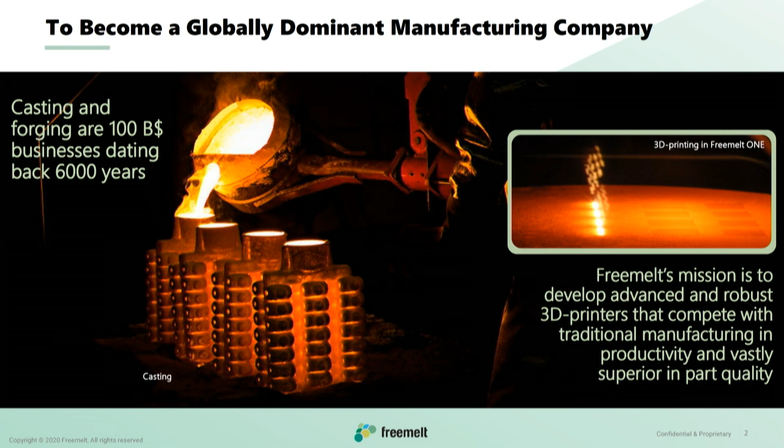And to do that, our mission is to develop advanced and robust 3D printers that compete with traditional manufacturing in productivity, but that will be vastly superior in part quality for some applications. So this is our ultimate goal, but on the way there, we also have, of course, stepwise goals for the company. So please, next slide.

The story of Freemelt starts in much from the story of Arcam, which is a company in Gothenburg in 3D printing. And the founders of Freemelt all have their background from Arcam, including myself. I was there for 10 years. It's a 3D printing pioneer company founded in 1997. They delivered their first system to customers in 2003.

Focusing on systems for implant manufacturing from 2007, and later expanded its business also into aerospace, selling in total hundreds of systems. The focus on aerospace led to the fact that it was bought by General Electric in 2017 for about 6 billion Swedish crowns. And up to that point, Arcam was the only supplier of electron beam 3D printers until we started the company in 2017 and started delivering systems to the market a bit later. So next slide, please.

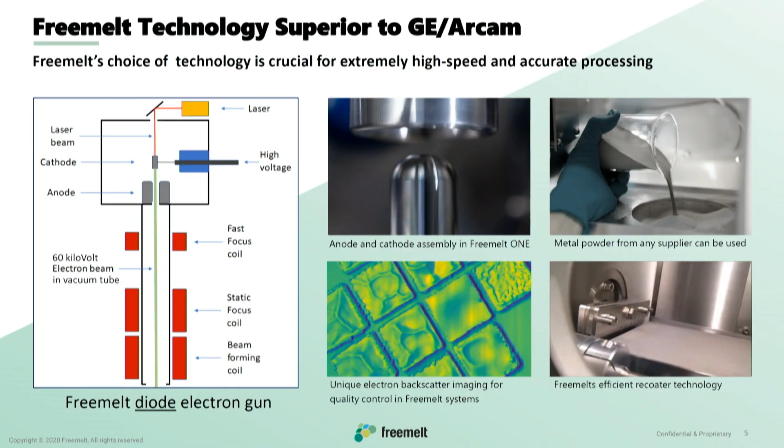We also use metal powder, and our customers can use metal powder from any supplier. This is a strategy for opening up markets and making it possible for customers to have versatility in the supply chain. We also have developed unique imaging, backscatter imaging for sensing, in order to have quality control in our systems.

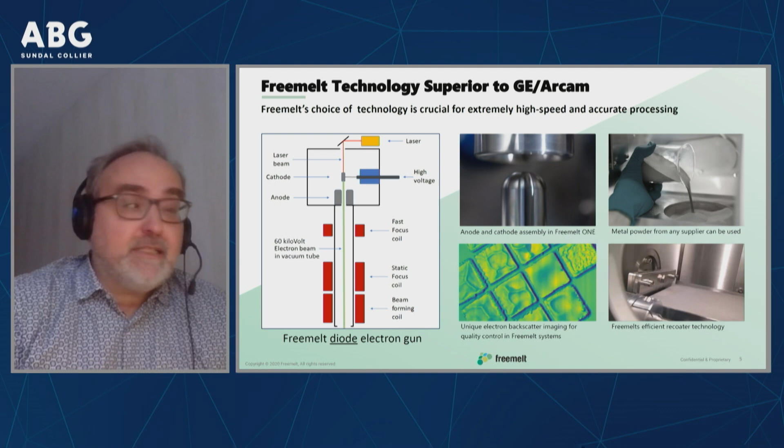And we also have developed our unique recoater technology, just like we developed the electron beam technology. So we have started from scratch with the technology, looked at everything, and developed what we think will work for the markets that we address. So next slide, please.

Freemelt started 2017. After exactly 2 years, we delivered the first system to our first customer, actually spot on time for what we promised to the investors back in February 2017. And Freemelt is now the #1 choice for material development in 3D printing. So far, we have installations in the single-digit numbers.

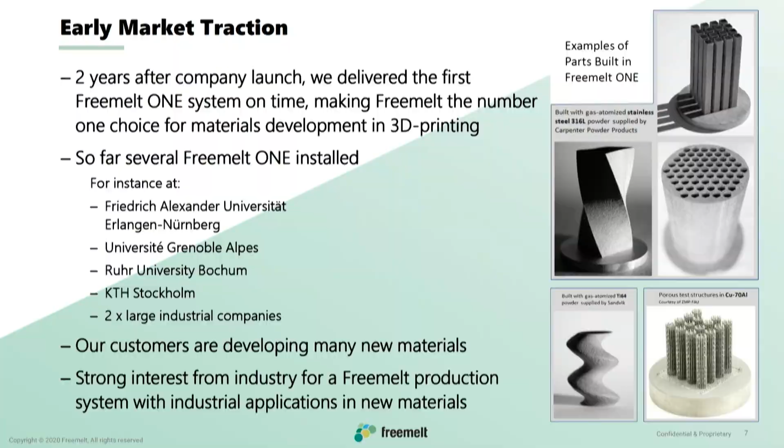We have, for instance, some of the most renowned institutes and universities in Europe. We have systems in Sweden, also at KTH, that we installed this year. But we also have systems with 2 large industrial companies with R&D departments that are very interested in material development for their applications.

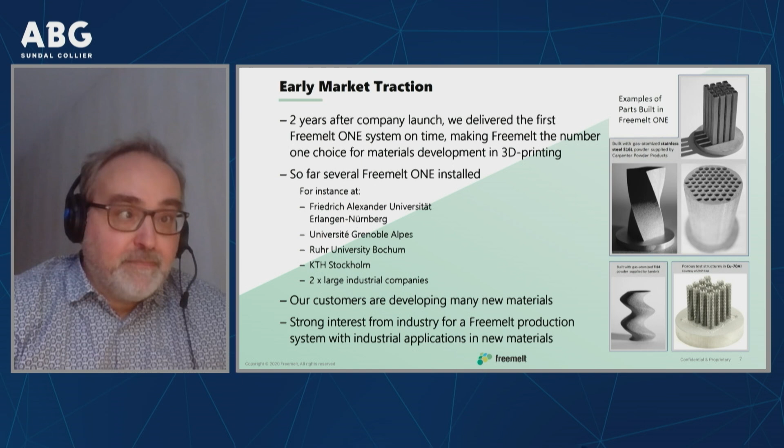And our customers are developing many new materials. But there is also a strong interest from industry for a Freemelt production system with industrial applications in these new materials that are being developed. Next slide, please.

So already from the start, we had a business strategy, which is a 2-step strategy. We are going from R&D to commercial applications in close collaboration with customers and partners. We started by developing and bringing to market an open source material research system called Freemelt One for development of new materials to push the need for an industrial manufacturing system.

And as I pointed out on the previous slide, some of the most renowned R&D institutions are now customers to us, producing research results promoting our technology. So what we say now is that this first step in the business plan is implemented, and we are now moving into the second phase of the company development. So next slide, please.

And the next phase then is the development of an industrial 3D printer optimized for volume production, with manufacturing processes and core technology directly transferable from Freemelt One. So in this way, we are aiming to build an ecosystem with a new system and a research system where processes can be developed and transferred between the 2 systems. But in this ecosystem are also our customers and suppliers of raw material, the powder, but also software companies providing software solutions.

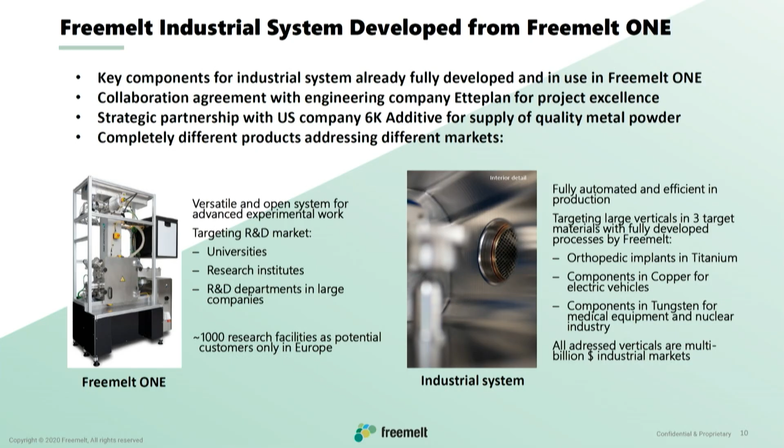Etteplan is chosen for the reason that it's a service company focusing mostly on additive manufacturing; it is one of their focus areas. So we have management from Etteplan in the steering group of the project, which is important for the excellence of this project. We also have strategic partnerships now with a US company, 6K Additive, for supply of quality metal powders to us and to our customers.

And these two products that will be in our product portfolio are completely different products addressing different markets. So we will continue to build and ship Freemelt One systems targeting R&D markets, universities, research institutes, and also R&D departments in large companies. That's where we already have success. And a rough estimate is that there should be about 1,000 research facilities as potential customers only in Europe, the same or probably even more in North America.

So we do see a great potential in this market of continuing our efforts to expand with sales towards research and development. But then we will also have a fully automated and efficient machine for production, targeting large verticals. And after a business study, we have selected 3 target materials where we are developing material processes for this system.

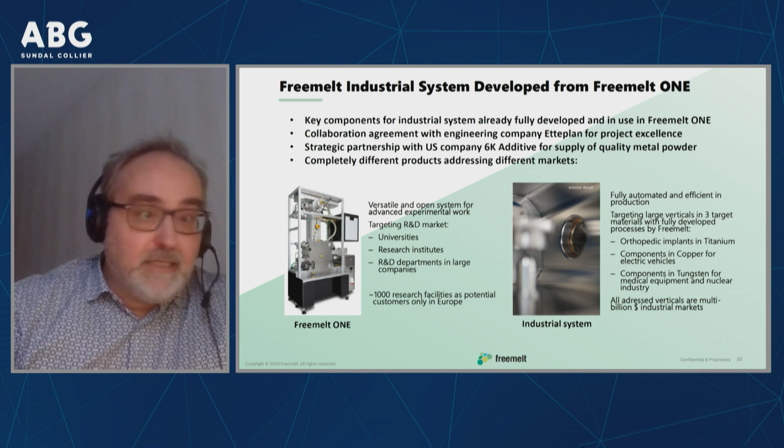One is orthopedic implants in titanium. One is components in copper, mainly for electric vehicles. And the third one is components in tungsten for medical equipment and the nuclear industry. All of these verticals are multi-billion-dollar industrial markets. Next slide, please. First, I will talk about the business case of titanium orthopedic implants. Next slide.

So this is the area where 3D printing has had the most success, actually. Somewhere around 3 to 4% of all implants in the world are manufactured today with 3D printing. The reasons for that are that it's a big advantage, both for lifetime in the body and also for adherence to the bone, with the net structures that can be built directly in the same process step, which enables bone ingrowth into the metal part.

And the total implant market in 2018 was $51 billion, mainly in joint replacement. Knees were the biggest part, followed slightly behind by hip implants, and then other extremity, and then other implants. And we are focusing initially on hip and other extremity parts like ankles and shoulders.

The growth of the market in total is about 3.5% worldwide, but the market share of 3D printing grows much faster than that. So it's expected that 3D printing will be the dominant technology in the future for implant manufacturing. So here is a huge market for us to address with a material, titanium, that works really, really well with electron beam technology. Next slide, please.

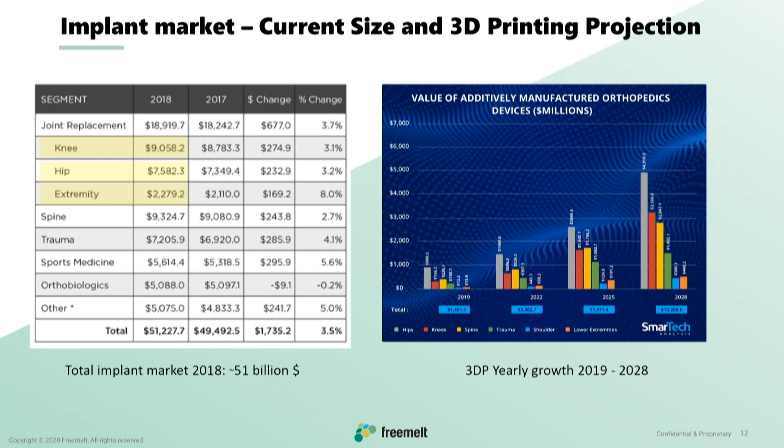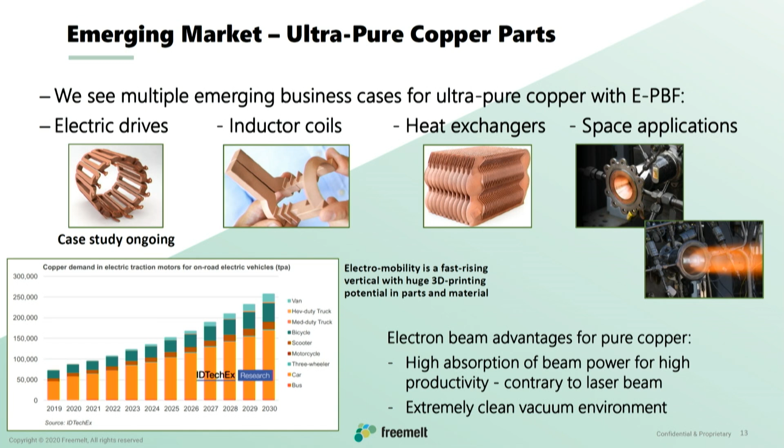And the other is that we are working with a vacuum technology. The processing takes place in vacuum. That means that we can have an extremely clean environment, which benefits the ultra pure processing of copper, which is very important because going from pure to ultra pure copper raises the conductivity of copper by up to 30%, which is, of course, crucial for things like battery technology and electric drives and so on. So here we see a very big potential for electron beam.

There's also been a number of case studies with electron beam systems when it comes to research on 3D printing with pure copper. So next slide, please.

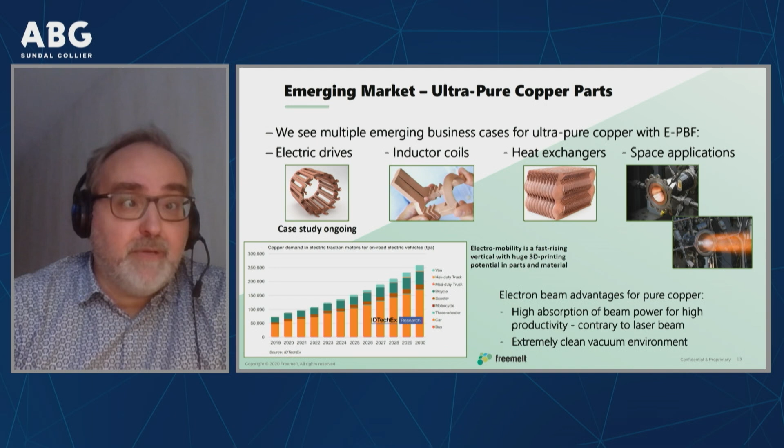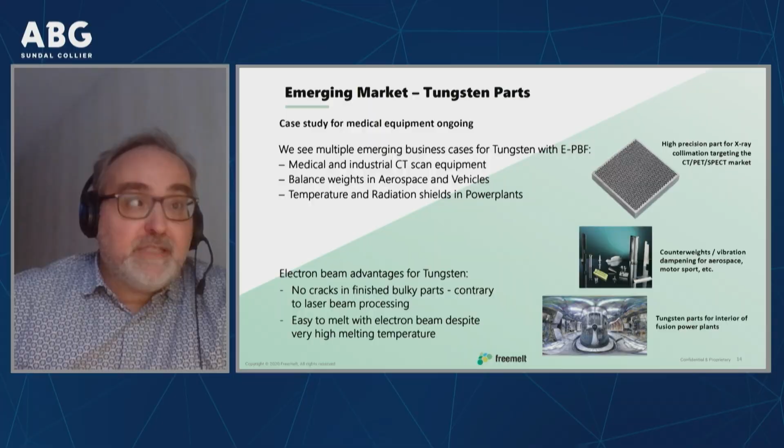The third and last market that we are initially addressing is parts made of tungsten. This is probably a little bit smaller, but still big applications. We are in a case study in this area for medical equipment. That is what you see on the top picture. This is what's called a scatter grid for CT scan equipment, which is a good size market for us, and also here the electron beam technology has strong advantages over our competitors.

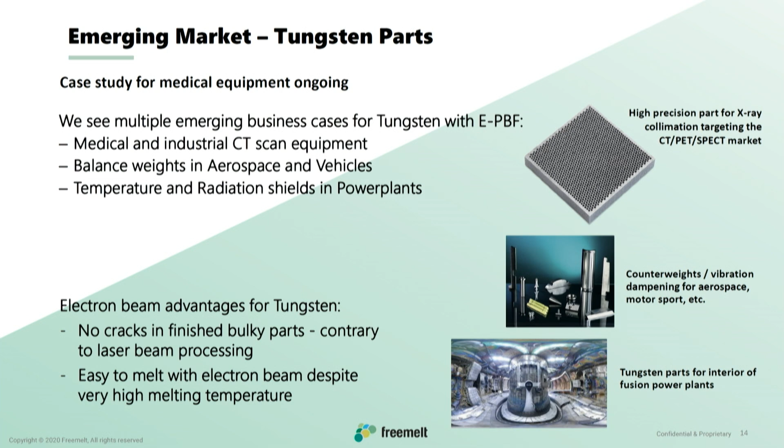There are no cracks in finished parts when we build bulky parts. This is not achievable with low temperature processing as used by our competitors. It's also easy to melt with electron beam despite the very high melting temperature of tungsten. Tungsten has the highest melting temperature of all the materials in the periodic table. But we also see other applications going forward, for instance balance weights in aerospace and vehicles, but also especially temperature and radiation shields in power plants. Okay, next slide.

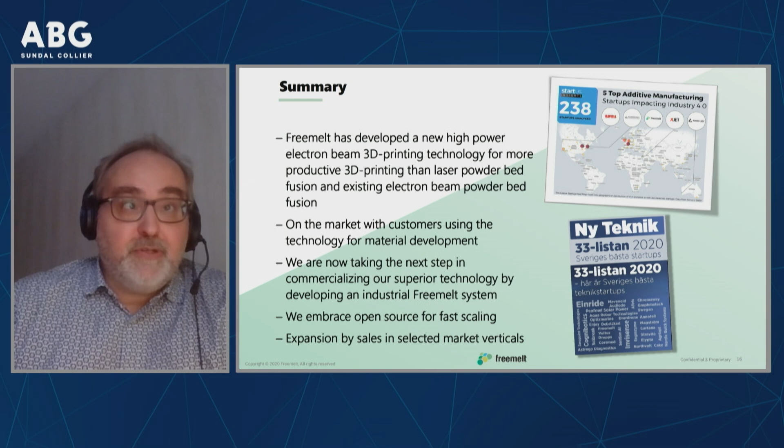And the expansion is predicted by sales in selected market verticals that I just presented. We were on the 33 list last year from Ny Teknik, for instance. Next slide.